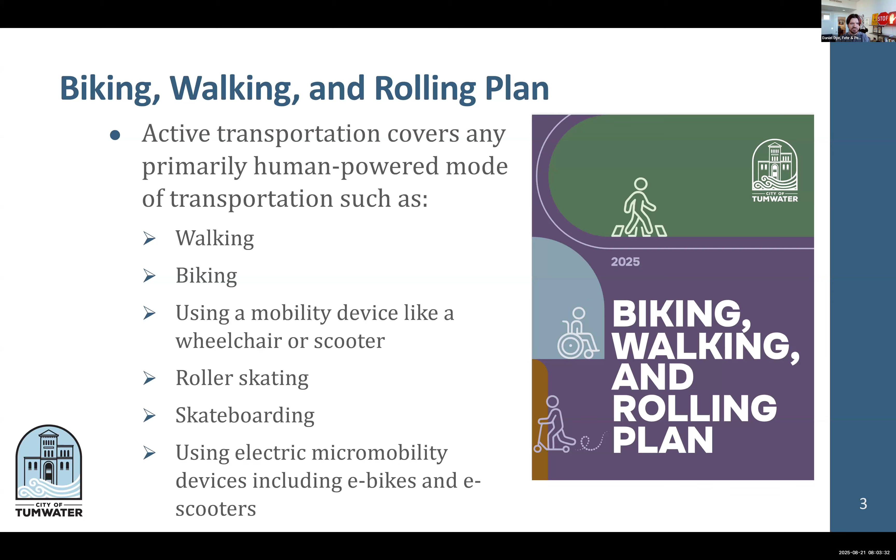So first up is the biking, walking, and rolling plan. This is really an active transportation plan that covers all of the different modes of how people get around. Primarily human-powered modes: walking, biking, using a mobility device like a wheelchair or a scooter, skating, skateboarding, or using newer technologies like e-bikes and e-scooters. All of those are considered in this plan.

We obviously need to invest in active transportation for a lot of different reasons. One is to provide access. Every trip, no matter how you're completing it, starts probably as a pedestrian trip, because even if you're walking to your garage inside your house, you've still got to walk there, and when you get to your destination you're probably walking into the building from the parking lot. But we also know there are other reasons to provide that access, including community health. There are new requirements from the state to have vehicle miles traveled reduction targets as part of everybody's comp plan. And we also want to think about mode shift. There's only so many roads we can build, so the more dense we become, the more people that live in Tumwater, at some point the geometry just doesn't work, and we're either going to sit in hours of traffic every day, or we're going to need to think about shifting modes to something more space efficient.

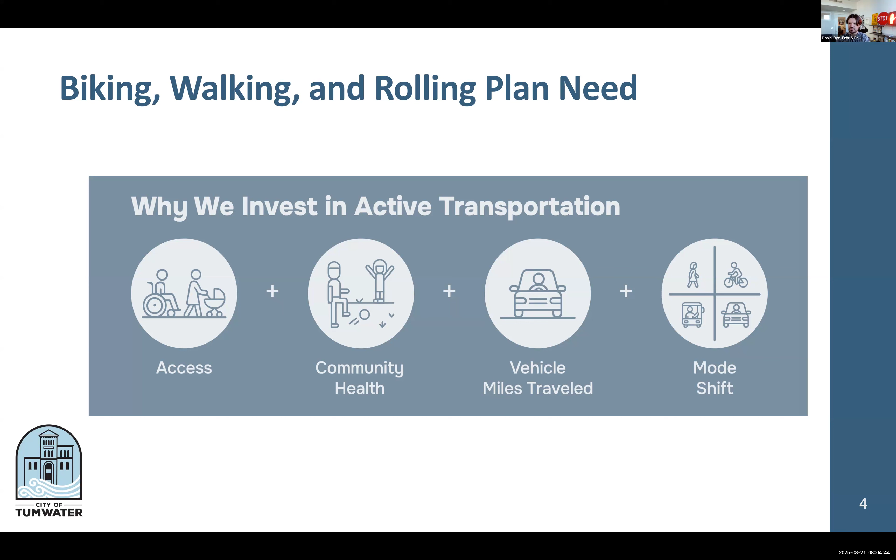On the vehicle miles traveled reduction targets, this is essentially, as a community...

Daniel, I have a question. I just wanted to know, what is your expertise? Are you an engineer? Do you do this for cities? Just give me a little background information on you. Thank you, Councilmember Jefferson. Sorry, I did not introduce myself. I am Daniel Dye. I am a senior associate transportation engineer, although I sit really on that engineering and planning line. A lot of the work that I do would traditionally be transportation planning. I've been with Fehr & Peers for 9 years now, and I've worked with a number of different communities on their comprehensive plans, including Tumwater. Okay, thank you. Thank you.

So on the vehicle miles traveled reduction, as we look at the community-wide scale, we're looking at reducing the number of miles people are traveling in a vehicle over the next 20 to 30 years, on a per capita basis. So I want to be really clear, with population growth, overall vehicles on the road may increase over the next 20 or 30 years, but we're hoping to reduce the number of miles that each person is taking.

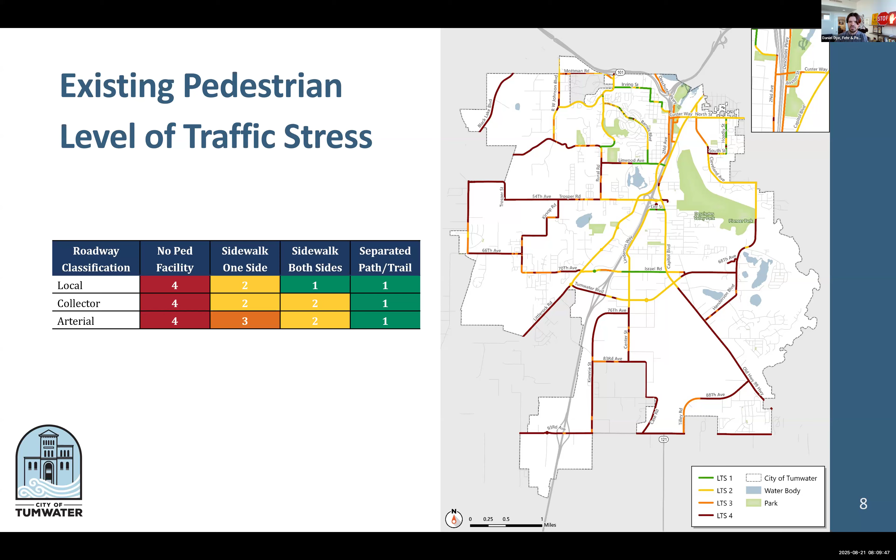When it comes to bikes, it's a little bit more nuanced just because bikes often are on the road in a striped bike lane. So we consider a few more factors, including speed and the average number of vehicles on a particular road on any given day.

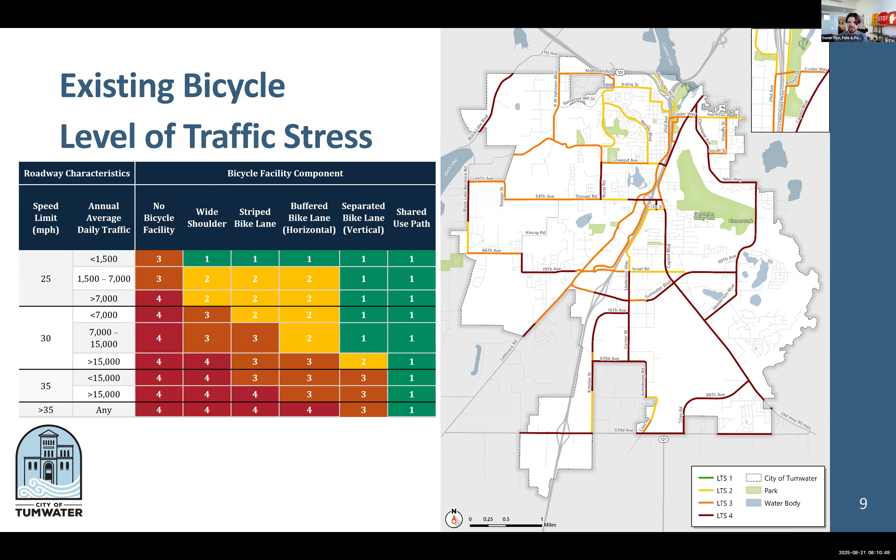We wanted to talk a little bit about the existing pedestrian network and pedestrian priority network. As part of that analysis, we looked at where there are sidewalks on one or both sides of the street. This is the best data that we've got about where sidewalks exist or do not. It doesn't necessarily mean they're all in good repair or meet ADA requirements, but it does mean there is a sidewalk there in one way or another.

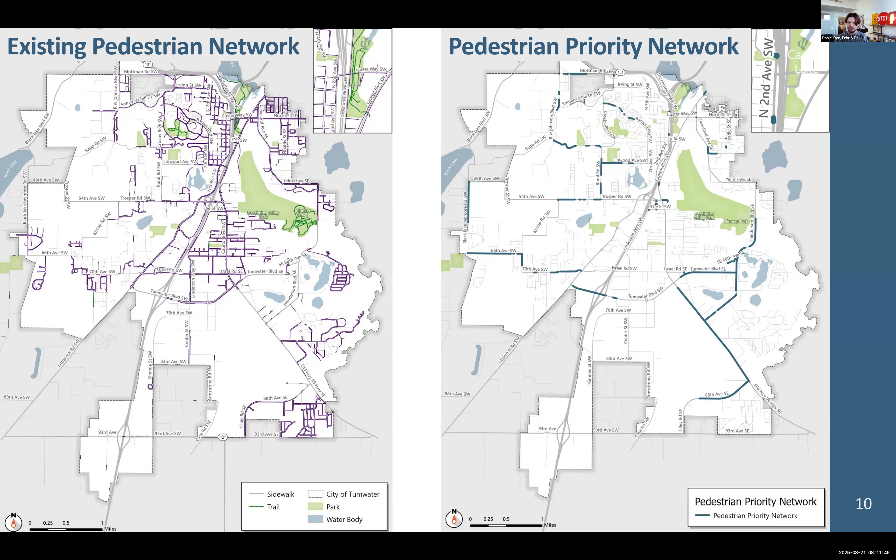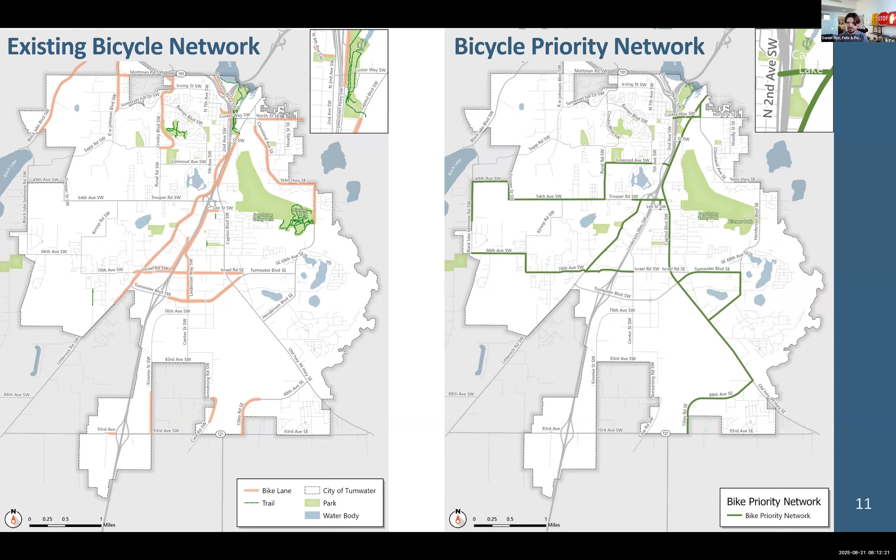On public outreach, we did have a number of different outreach activities. One was the transportation tour with Planning Commission and City Council. I believe I met several of you on that tour back in... February, I believe.

It was a little darker, but that was actually kind of good because one of the things we think about is how do we make it safe for people to walk and bike all parts of the year. Illumination and what you can see as a driver, pedestrian, or bicyclist is very different at night, especially in areas outside of the more dense core where there is more street lighting.

We also had a transportation open house. Community members were able to put dots on a map, provide sticky notes of comments and things like that. They were also specifically asked a few questions about how do you travel around the city, what stops you from using other modes other than driving, and how could we make those other modes of transportation more appealing. We really appreciated getting that feedback, and we've worked to incorporate it into these drafts that are in your packet.

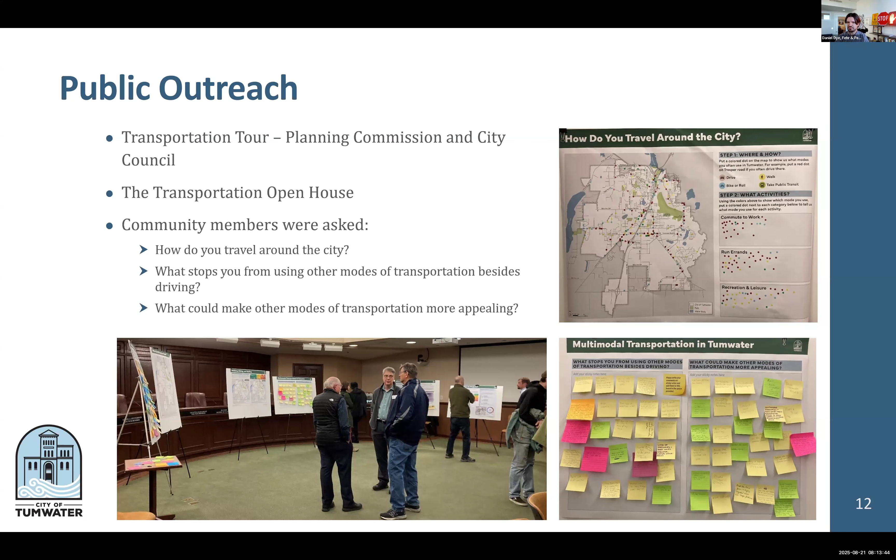Goal 1 is to improve and maintain a complete system that efficiently supports people walking, rolling, biking, accessing transit, driving, and making regional connections. Goal 2 is to prioritize safety and quality of life, especially for the most vulnerable users of Tumwater's system. We think of vulnerable users as people who may not own a car for financial reasons, or people outside of vehicles. We've made a lot of improvements on vehicle safety for occupants, but if you're outside a vehicle - walking, biking, or rolling - it can be a lot less safe with heavier and higher vehicles.

Goal 3 is to invest wisely to support a resilient and maintainable transportation system. 4 is to minimize our impacts and advance environmental goals. And 5 is to build public support for transportation system improvements by incorporating robust outreach as part of transportation plans and design projects, really making sure we're building what the community is supporting.

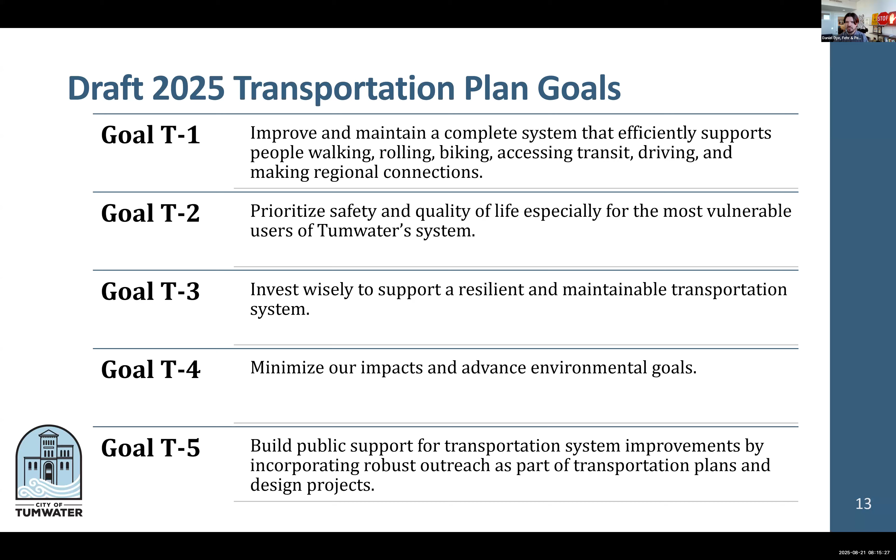Up next, we're going to get into the future automobile network, but there are a few things I need to explain first. The first is this concept of level of service. Essentially it goes from LOS A to F - unlike school teachers, we didn't forget E in our grading system, so there is an E in there.

LOS A through C is pretty low congestion or no congestion. D is where it starts to get a little more congested and you're sitting and waiting. E and F are really reserved for heavy congestion. F is essentially sitting through a traffic signal for more than one cycle - you've gotten a green light for the people in front of you, but didn't make it through that green light. So that's the scale we're looking at.

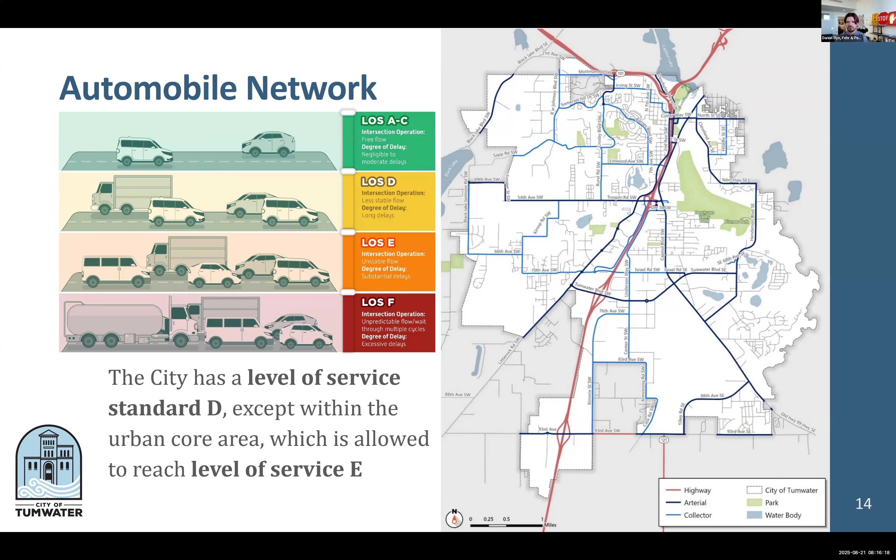When we look at the future automobile network, we're just going to focus on future for today. We looked at 40 different study intersections throughout the city and UGA area. 11 of those are already planned to be roundabouts. Outside of those 11 intersections, 5 more are expected to exceed the level of service standard without improvements.

Daniel, I did have a question on that one. I'm looking at the ones at the top off of North Street, the Cleveland connections, that show that they're low priority. I wasn't sure if that's really the case, because right now they show a level of service of A through C, they're the 4 top ones. On another page, page 49, we show that on another one that was provided, but I was surprised about that. I thought we were planning those to be roundabouts, so I'm not sure why they're not showing that they should be leveled up, that they should be roundabouts.

So you're saying they look like they're showing as a really good level of service, green, but they're planned to be roundabouts? I'm questioning the 4 dots at the top, what the plans are for those particular intersections, because we've gotten feedback on those. Sorry, I'm being kind of babbly, but I'm curious what the plan is for that.

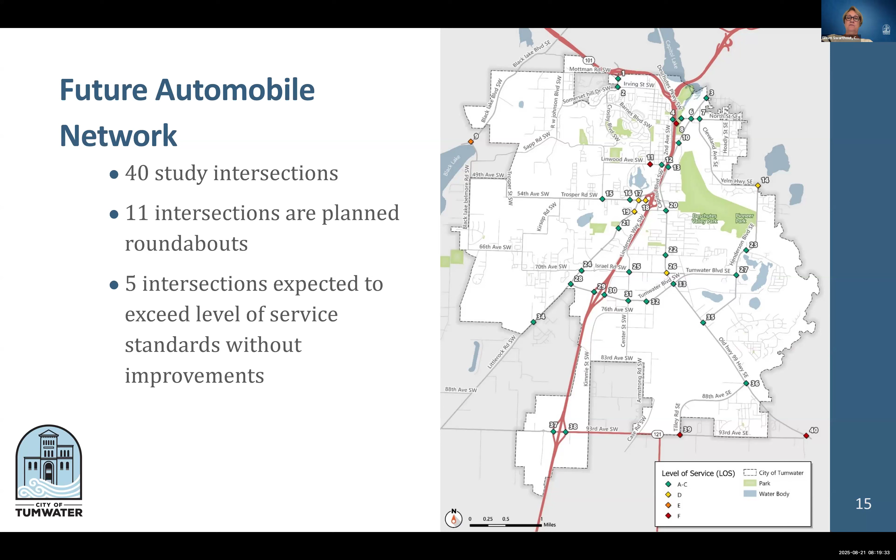So Daniel might be able to clarify in later slides, but my assumption is that they would be low priority because we cannot undertake them until the E Street connection is done, and that might be why. Okay, got it, thank you. That's likely part of it, and part of it we'll talk about the prioritization a little bit, that's actually coming up on the next slide.

So I want to just talk through the priority projects. These are essentially, based on the goals, we came up with several metrics, 1 to 3 metrics for each of the goals, to give points to each project. So a perfect project would probably be something that improves bike and ped connections, also improves an existing or future level of service failure, while also lowering life cycle costs or something like that. I don't have a perfect project in mind, but there's a lot of different things that go into the prioritization.

The reason for the priority projects is not to say the city should build all the high priority projects first and then move on to medium priority projects as funding becomes available. It's really to say, is there a mismatch between your expected revenue and your expected expenditures? The project list is pretty well calibrated for Tumwater to be close to what you're expected to be able to afford over the next 20 years. That's not always the case for every city. Lots of cities have a much bigger project list, and it's not to say you can build everything on this list in the next 20 years, but with current projections, current revenue, and current funding, it's not super short of building all of those things.

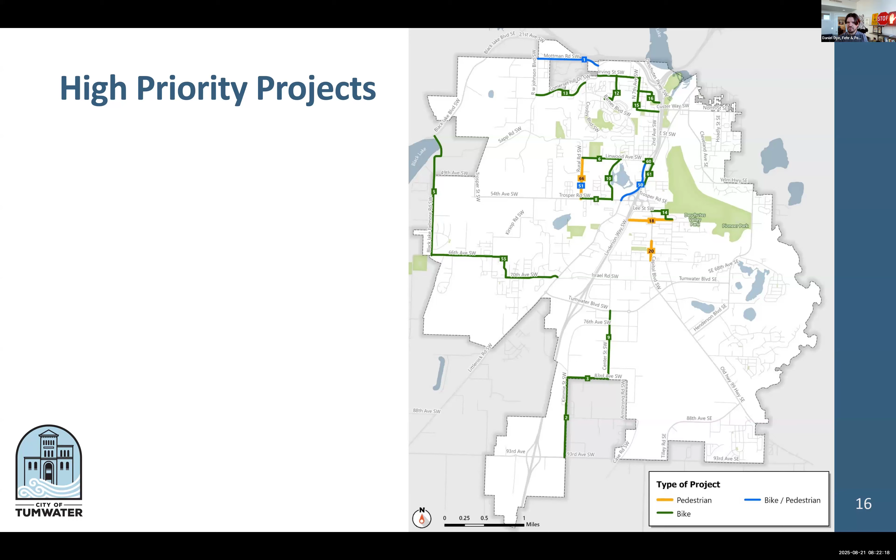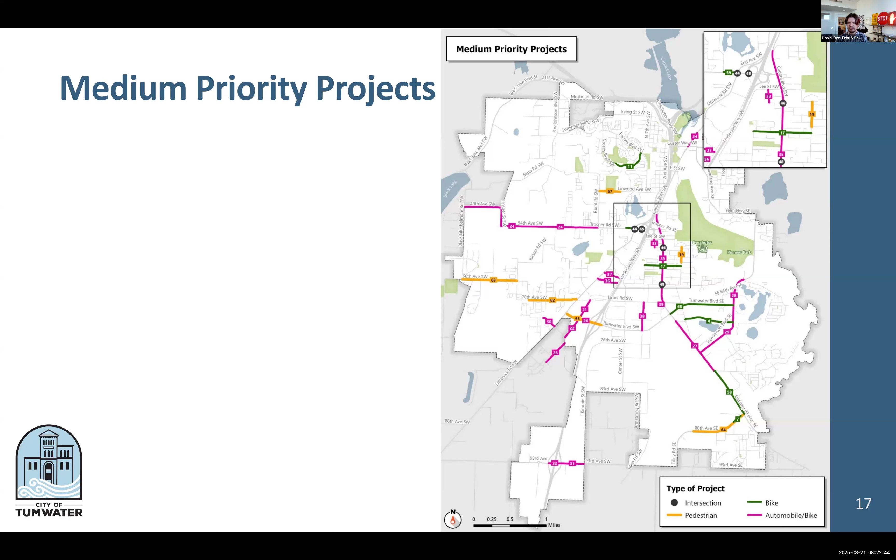On the medium priority projects, you see quite a few more vehicle and intersection projects. Several of those are probably items where there was not a current planned roundabout or intersection improvement, so a new project needs to be brought in to build that connection based on the LOS analysis we've done. Then on the low priority projects, that again gets to some of those other intersections that are roundabouts - not to say those are lowest priority, just that because they're not failing with the roundabout, that's how they shook out in the scoring.

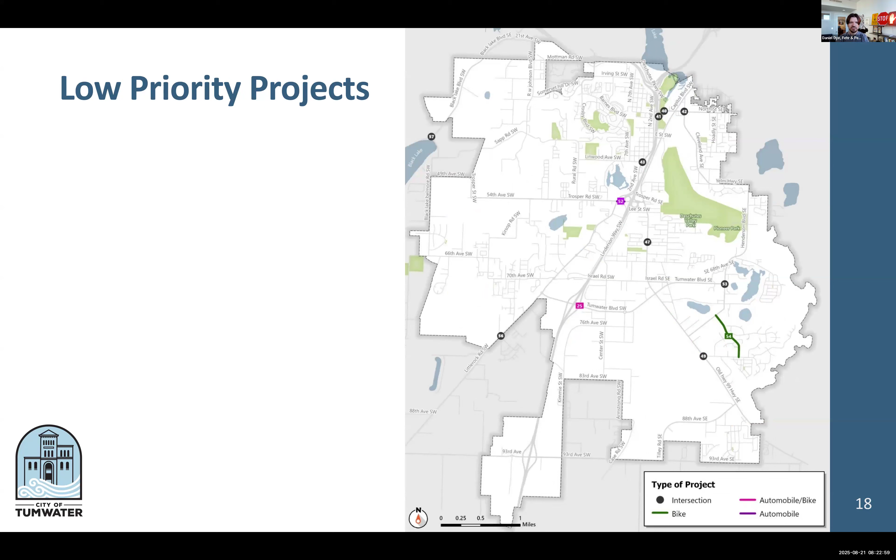We do have time if we want to look through any of these particular projects, and I know there's a lot on the screen, so if there are any questions about any particular projects, council members could just give us a number from your packet and we can go to that slide if needed.

Do you have any questions?

I was surprised about the rural road - that's been kind of one of my pet ones because I see people going back and forth. So it was nice to see that the study came across on that one too, with an opportunity to increase sidewalks to address the pedestrians we have in the apartments and some of the houses up the way. So that one made the list, and it's high priority for pedestrians.

Another question for the committee: is there anything you felt was missing from the project list that should have been on there and you didn't see it, or anything you were surprised did make the list on the opposite end?

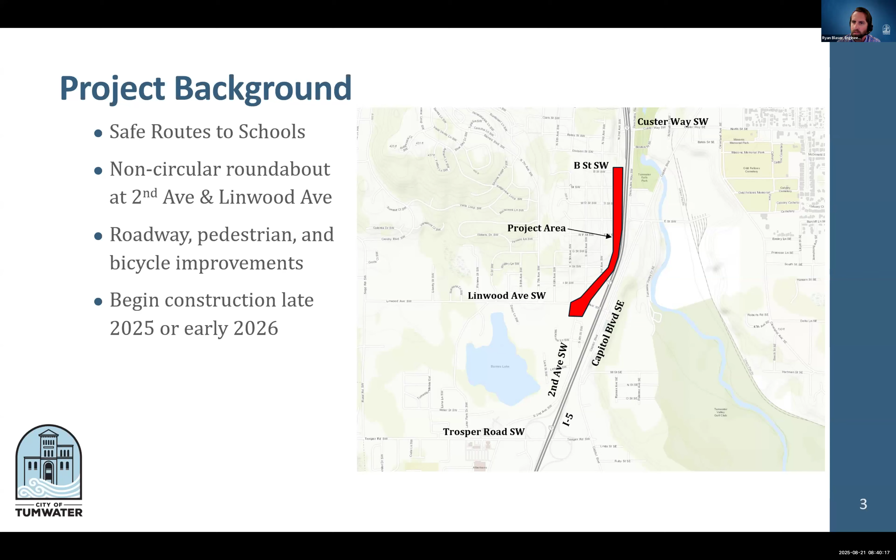So the big ticket item from this morning is a road closure. We are proposing, due to the complexity of this intersection, a full road closure at the intersection of 2nd and Linwood. This closure is going to speed up construction of the roundabout significantly and ultimately reduce the overall impact to the traveling public by reducing the overall project length. As you can see here from the notes, there's a lot going on at this intersection. There's a lot of utilities. There's old highway concrete panels underneath it that are 8 inches thick. There's a lot going on here, and without a road closure, it'll lengthen the construction there and increase the impact to the public.

Ryan, how long will it be closed? So as of right now, that's a great question, council member. We aren't expecting 4 months. We're not expecting 6 months. We do plan to coordinate with the contractor on that. We are able to limit that construction window for the closure. I don't have a finite answer for you at this time, but we're expecting 2 months potentially. Oh, okay, so I'd like to know how long with the road closure and how long without the road closure.

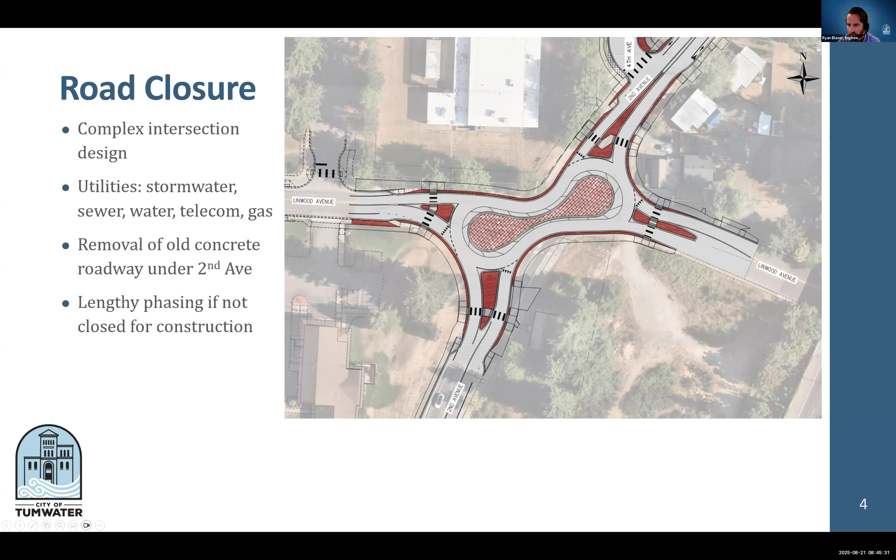I have met several times with the fire department and police department, including the police chief and fire chief and others involved, and they are in support of the road closure on a few conditions we're planning to implement. As you pointed out, that's a very important connection between Linwood, Second, and Capitol. It's either there, or up to Custer, or down to Trosper. So they requested a 24/7 access during this road closure to access that, and we are able to provide that.

We looked at several different phasing alternatives, and there are several options that will work. The contractor will be able to either adopt our plan or come up with their own. But 24/7 access is needed since the North End Fire Station is right there on the southwest corner, so they'll be able to pull out onto Linwood and either travel south on Second or go across to Capitol.

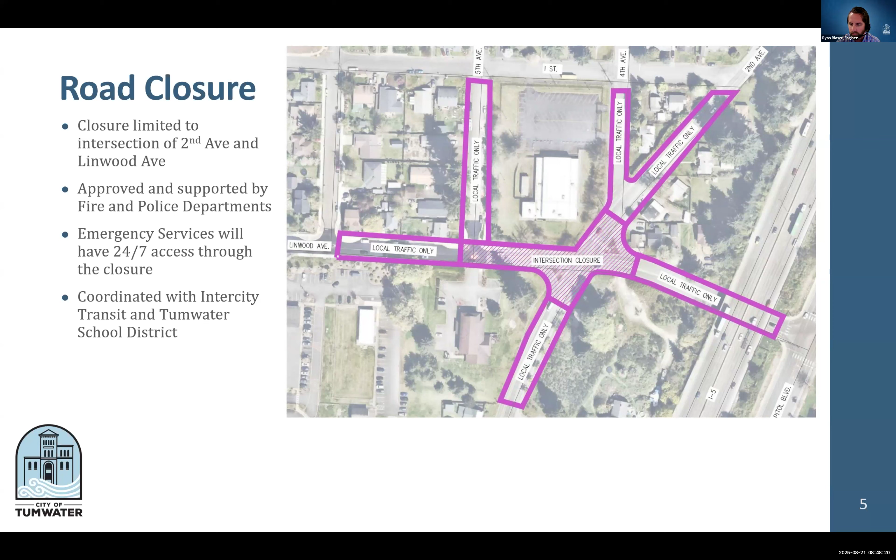No one likes a detour, no one likes a closure, and adding 6 minutes even is an inconvenience. However, as I mentioned earlier, the overall project duration will decrease significantly, in our belief, due to this road closure if implemented. All detours will use current practices, message boards, and individuals flagging if necessary, and it will be a clear detour route no matter which direction you're going from.

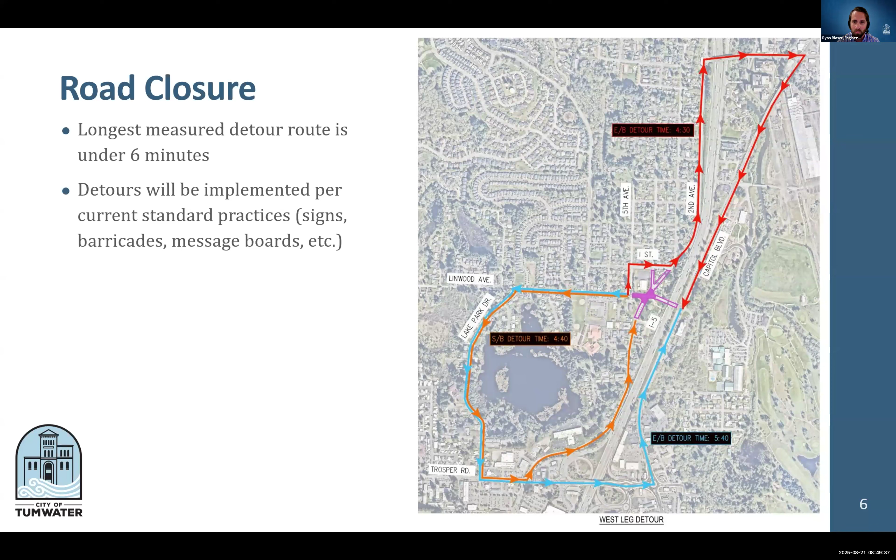So hopefully that answered your question a little bit more. Are there any questions? Yes, very helpful, thank you. Okay, stop sharing your screen there. Do you have any other questions? Okay, good.

So I have a few questions. As far as the timing of the project, do we have any control of being able to do it when school's out? Because then we don't have to worry about the school buses and the kids. Do we have some power and control over the start of the contract construction?

We do. That's actually been a discussion amongst staff on when the road closure could be or should be implemented. Just this past week we coordinated with Tumwater School District on their proposed school routes for the upcoming year, providing alternatives if it does happen during the school year, and what that could look like as far as impacts to their routes. So we do have control over that, and it can be looked at further or directed to us.

I'm just thinking about, not trying to be negative, but with Israel Road we were trying to have that open again, and you know the things you find underground that you don't know about, like leftover pieces of 8-inch concrete and things like that we may encounter. So just trying to keep our fingers crossed for 2 months, but it may take a little bit longer.